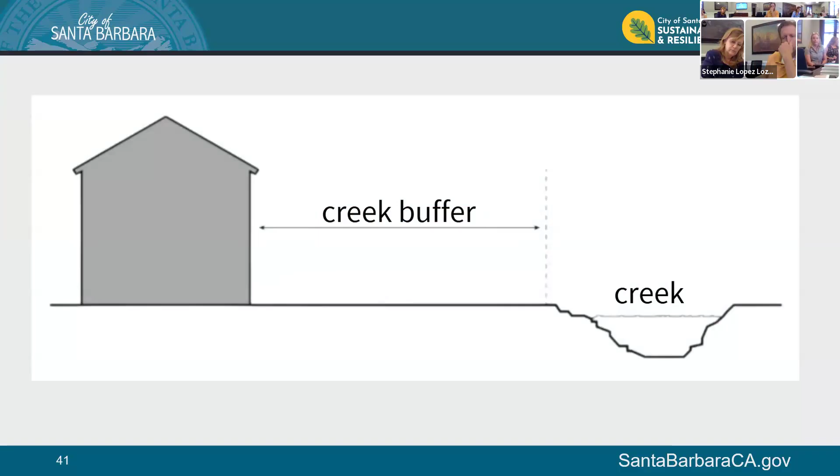So the benefits of creek buffers are many, but the primary one is that you are trying to get structures not too close to the creek where they can be subject to undercutting from erosion and flood risks.

In addition, we're really trying to limit creek bank hardening, so putting concrete and other things in the creek that can actually speed up the creek and cause downstream erosion and significant flooding.

In addition, the creek buffers provide an area for runoff to be slowed and infiltrate into the ground before entering the creek, so that has water quality and flood protection benefits.

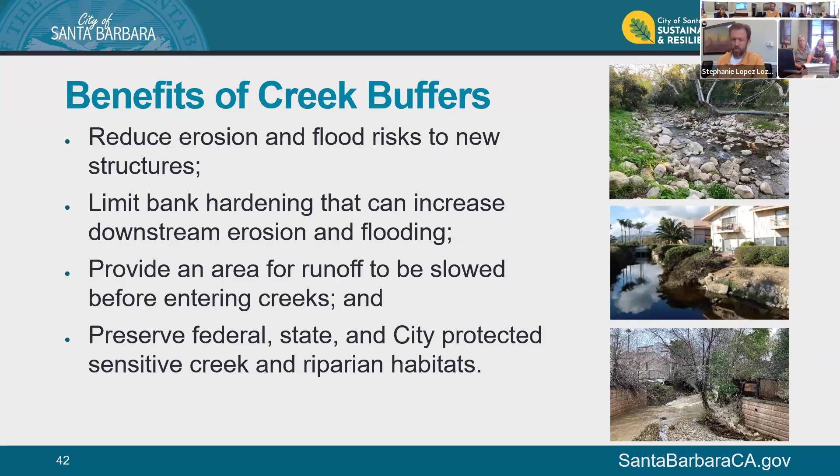And in addition, we are required by the state and federal government, and with our city policies, to protect sensitive creek, riparian, and wetland habitat.

Next slide. So we've gotten the question of why does it have to be an ordinance? Like, why do we have to protect creeks with an ordinance? Our only codified creek buffer is 25 feet from Mission Creek, and it really comes from the 1960s when there was a lot of flood issues in the city. There are no other codified creek buffers in the city.

And so the way it works now is that when applications come in that trigger CEQA reviews, those are discretionary applications. So those are things that either the city is proposing or which requires a body such as council to make an action based on their judgment. So those are things like coastal development permits, conditional use permits, and some design review permits. When that happens, that triggers environmental review.

And so through that, we are doing case by case determinations of buffers based on technical reports and basically a back and forth between staff. And it's really led to a lot of cost, a lot of time, and a lack of consistency over time.

But in addition, as we've seen a lot of legislation, particularly with housing at the state level, that bypasses discretionary reviews. So a lot of those state laws now say you can't have discretionary actions, you could only have building permits or ministerial actions. We're seeing a lot of cases of things like accessory dwelling units and things we want, like we want all those things for housing, but we are actually seeing some of them built right on the creek bank, right there. We've had several cases of concern.

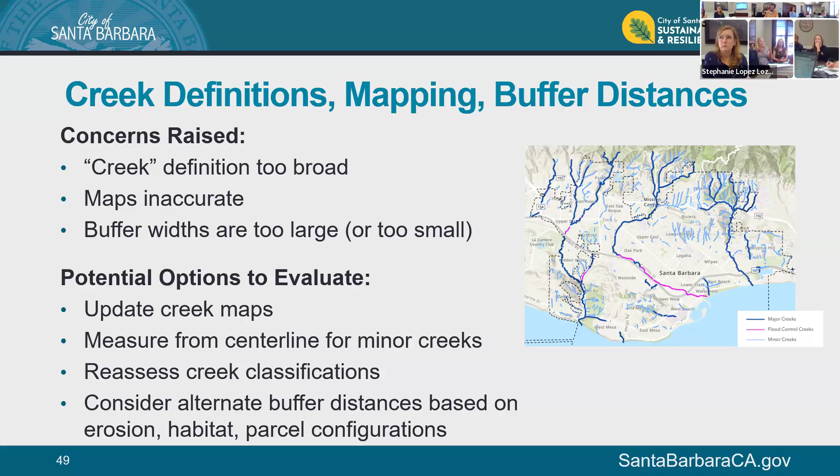So for instance, within the 50 feet, there is a zone for less use versus more use.

Thank you, we're so sorry for being late, we had a presentation at the IPM committee this morning, so sorry. But thanks so much for coming.

So we had a lot of comments about what's allowed in buffers. The current draft is very restrictive as far as what would be allowed to be done within buffers.

So we're definitely hearing the comments of wanting to have some sort of minimal use of that space, whether it be sheds or patios or landscape features.

So we're taking those considerations to heart and looking at how we could address those, as Melissa was just stating. We could have, within a 50-foot buffer, let's say as an example, 35 feet from the top of the bank, maybe you'd be allowed certain things like a 300-foot shed, a hardscape patio.

But from 20 feet from the top of bank on, you might be allowed trails or different landscaping or things like that. And then from the top of bank to 20 feet, that's really just the riparian habitat area. So we're looking at options like that.

We had comments about existing historic landmarks or historic structures, or even community benefit uses that are already within these buffers that would become existing non-conforming, and concerns about the threshold for substantial redevelopment being too low, essentially. So, how would historic structures be allowed to be maintained if they needed to make significant structural repairs, as an example? Those are things we're looking at as well.

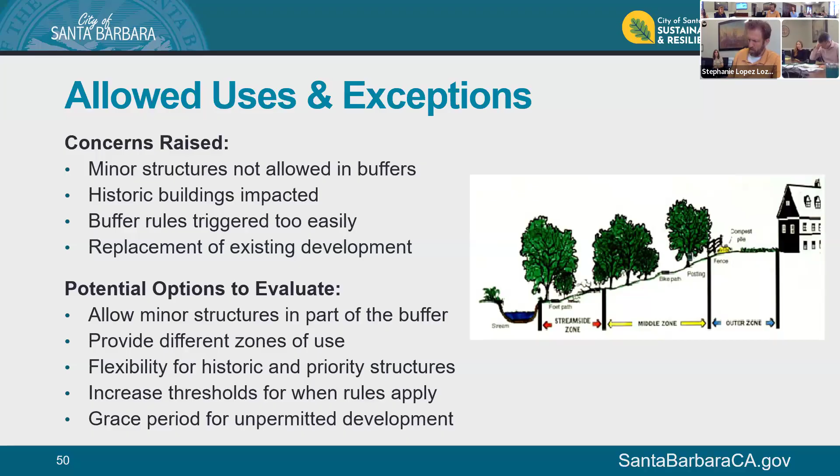So we heard a lot of comments just about the organization and clarity of the ordinance. It's currently organized by process, like what permit process a person would go through if they were doing work adjacent to a creek. So we've looked at maybe changing that to look more specifically at different types of projects falling into different categories, basically reorganizing the ordinance.

The modification process as outlined right now is too costly, but also potentially uncertain. The outcome felt uncertain based on the community comment that we got. So we're looking at potentially trying to make that more objective, and have it state, instead of a modification may be granted, if you do XYZ criteria, it will be granted, just to provide more clarity.

And we had a lot of comments about the need for this ordinance, and kind of like, why now? Why are we doing this now? A lot of questions about, we have existing floodplain regulations, why do we need this? So I think that's on us to really better communicate the why behind this. Floodplain regulations are not changing, those are federal regulations that this ordinance does not touch, but there are other considerations, other hazards like erosion rates that we are trying to address here, as well as resource protection considerations.

So the issue is, when we talk about urban stormwater runoff, really the biggest effect on water quality in this city is pavement. All the runoff associated with pavement contributes the most to water quality degradation, and that essentially modifies the hydrograph. When it rains, typically in a prehistoric environment, water would soak into the soil mostly, and that contributes to groundwater, contributes to base flows in the creeks that allow them to flow between storms more often. It also has less of that peak flow hitting the creeks right away during a storm. However, when it gets paved, you get that water.

It's essentially flash flooding, on minor and major scales. That causes increased erosion in the creeks, which creates channel instability, which then erodes banks, affects properties, affects houses and structures built next to the creek. It also affects habitat, wearing away around roots, and causes down-cutting in the creeks, which basically creates this snowball effect with a lot of different detrimental effects.

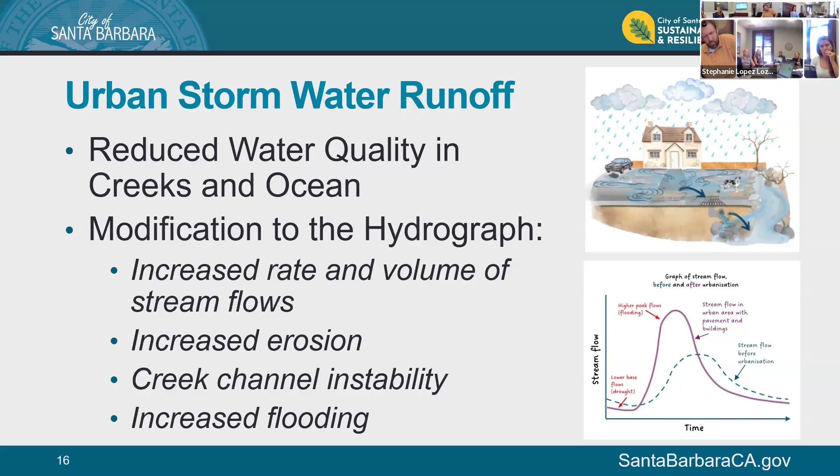So when we modify this - you can go to the next slide, thanks - when you talk about low impact development, that's modifying this already built environment by capturing and infiltrating that stormwater on site. We have pavement, it's necessary in a lot of places, but wherever we can capture that runoff as close to where it occurs as possible, that can increase groundwater recharge and creek base flows between storms. This improves water quality, because a lot of pollutants directly run off, and many of these pollutants can be naturally processed in the soil by microbes and plant uptake and things like that. It also reduces that peak of runoff, flooding, and erosional forces.

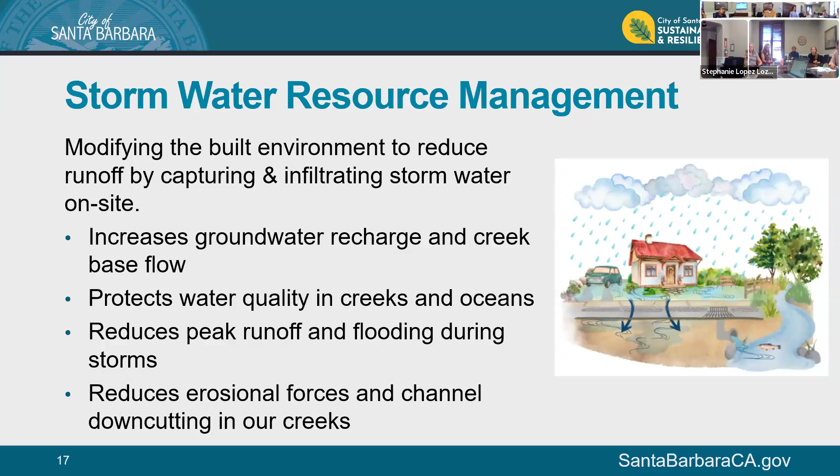So next slide. For the purposes of this presentation and project, a parkway is the space between the street and private properties that's not sidewalk - that's what we typically call a parkway in the city. This is public property for the most part, in the right of way, and it will contain landscaping, sometimes concrete, utilities, street trees, signs, and driveways. It's sort of everything thrown in there. In most cases, the responsibility for maintenance falls on the property owner, and it's often landscape, and often hardscape. Next slide.

So these parkways represent an opportunity to implement these LID approaches in the city. This is city-owned property that we could utilize, along with the cooperation of property owners. A lot of cities for years have had programs that utilize these parkways for stormwater capture, citywide and countywide programs.

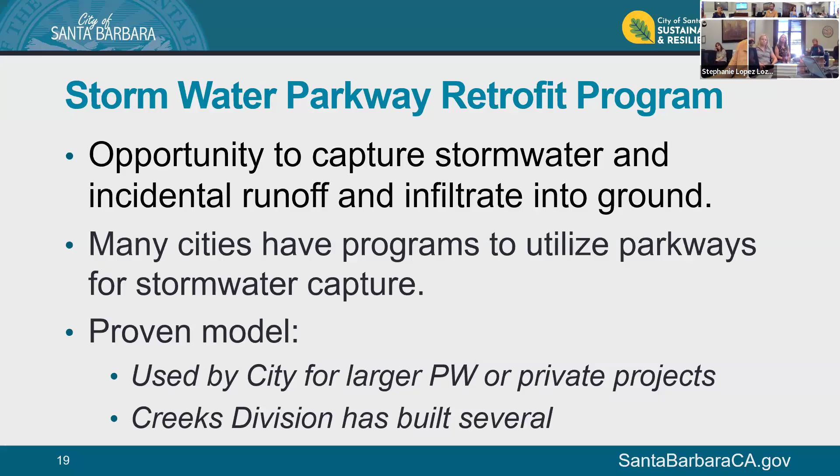The City of Santa Barbara has done pilot projects. The Creeks Division has done some, and Public Works has done many, a lot of those associated with compliance with the stormwater management program in order to capture runoff when there's larger projects. But we haven't had a citywide program. It's been a bit piecemeal, and we haven't had cohesive, standardized designs and a driven outreach for that.

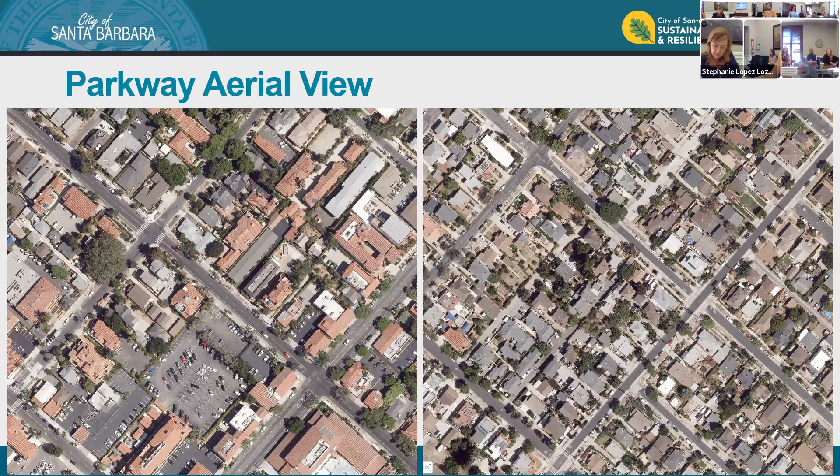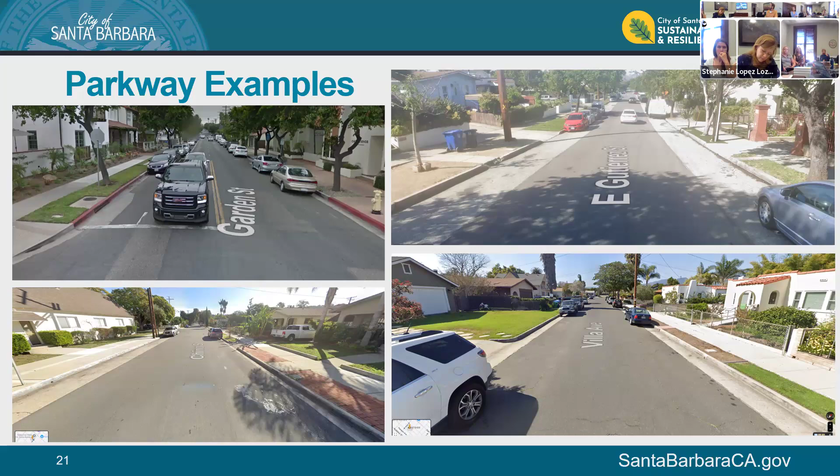In that bottom right picture, on the left side it looks like it's just a big yard, but that's actually city right of way—it just doesn't look like it. Next slide.

Programmatically, citywide, we've got about 27,000 parcels. If we assume 50 feet of frontage—the median frontage of lots is actually 66, but 50 feet is conservative considering driveways and things like that—with a 5 foot wide sidewalk, that equals about 250 square feet of sidewalk per parcel.

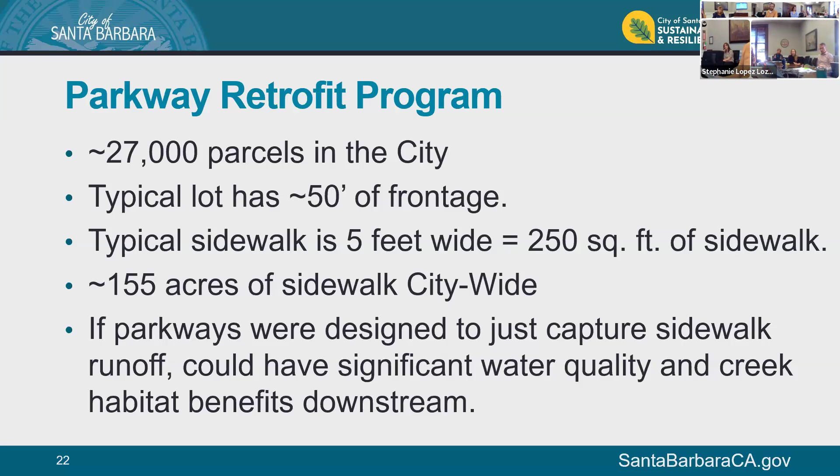Pushed out citywide across 27,000 parcels, just counting the sidewalks, that's 155 acres. We often, when we do projects, look at the impact we're having, how many square feet of runoff we're capturing. So the potential here, with a program that can be done relatively cheaply and expanded out, could have a big impact—and most importantly, right at the source, which is that LID principle.

Next slide. So we've been developing this program, and coincidentally, a resident reached out to us and said they were interested in doing something in front of their property. So we developed plans.

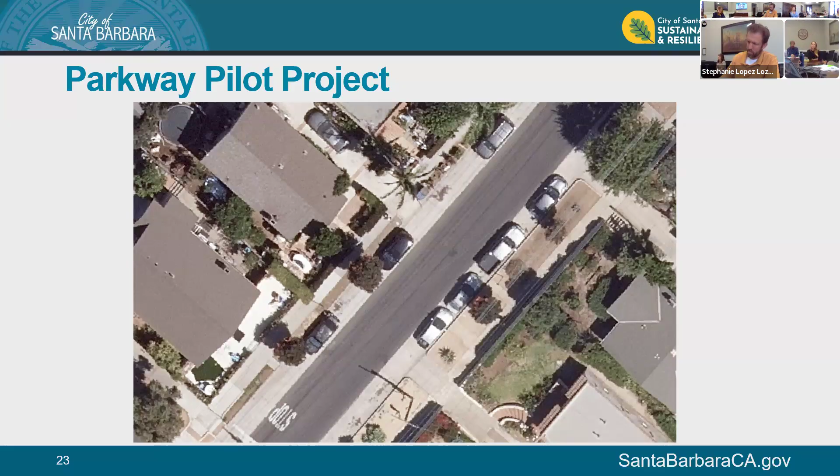This is on East Gutierrez Street. We're looking at the aerial photograph on the right side of the street, and the house on the right side—the top house—you can see that brown parkway in front of it. It's a 9 foot wide parkway. Next slide, I think there's more pictures of it.

Here are photographs of it, from across the street—this is the parkway. It's a great opportunity to capture stormwater, but the way it is right now, it's mounded. A lot of the sidewalk runoff runs down the sidewalk and then off the crosswalk or into the neighbor's parkway, which is essentially impervious. So this is a great one to kick it off.

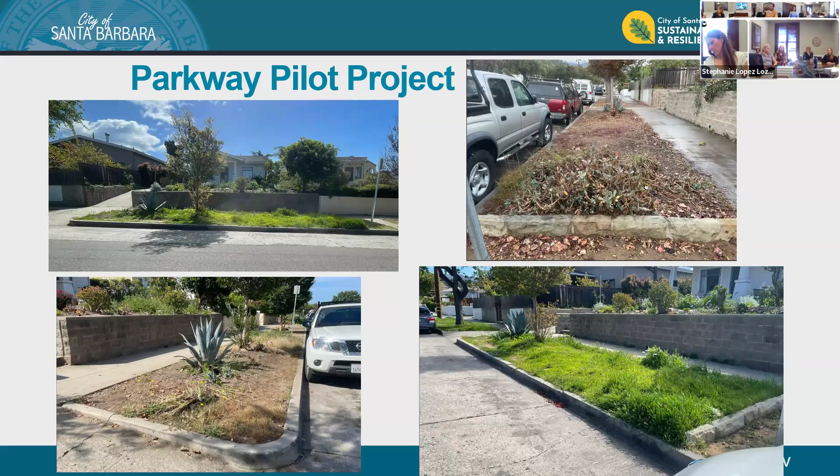These are just different angles of that. Next slide. This is a thumbnail sketch of what you could do in a parkway like this—there's a tree in the middle, and we have a lot of constraints: a water meter, gas lines, sewer, all the things you'd have to work around. But essentially this is what we're looking to do: capture some of that gutter flow.

Because this is such a wide parkway, we have the width to grade it down a bit, getting it below the level of the gutter, and create a passive flow from the gutter into this parkway. Next slide.

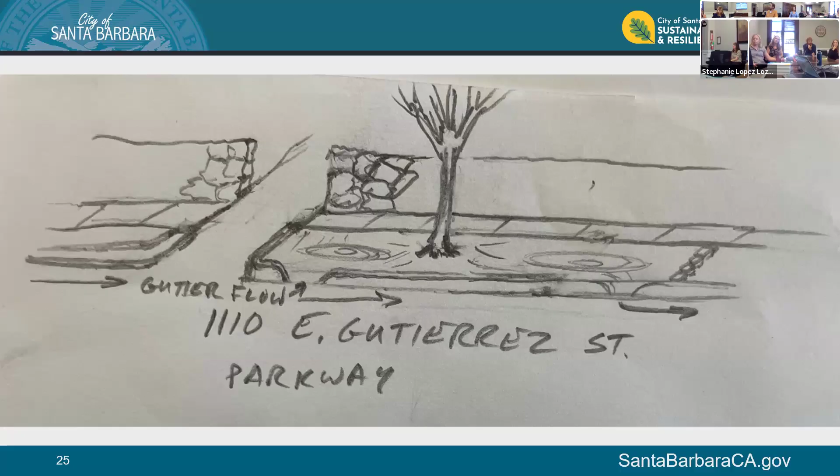And so we surveyed it, worked with the property owner, engineering, transportation, and parks, just making sure we're checking all of the things that might be a concern: pedestrian access, the slope, and anything the neighborhood needs.

This is the more developed plan. It still looks like a sketch, but this is what we went off of. Based on the surveys, you can see that's the whole parkway, the curb cuts on the left and right. So the street is on the bottom, the sidewalk's on the top. And then creating cross sections, this is basically to help us build this thing.

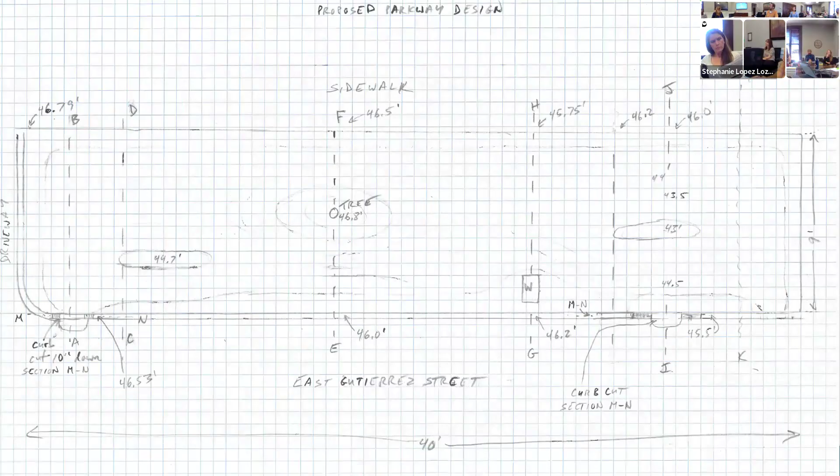And here's a cross section showing where the curb cut is. And this is where the tree is.

For this project, the cost to build it was $6,400. That's excavation and soil removal. The timeline was August 2025, and actually we built it yesterday.

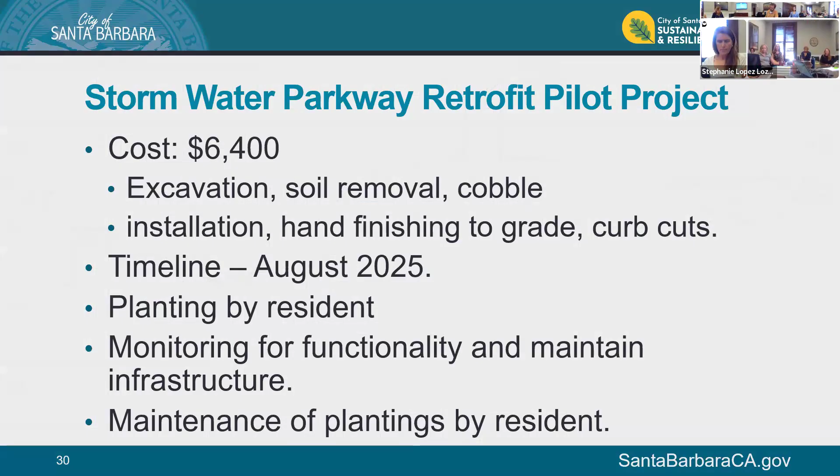We're still working on it. I just came in late because I was talking to the concrete cutter contractor. The resident will plant it, we'll monitor for functionality and maintain the infrastructure.

This is yesterday, excavation. And this is a little bit more cleaned up.

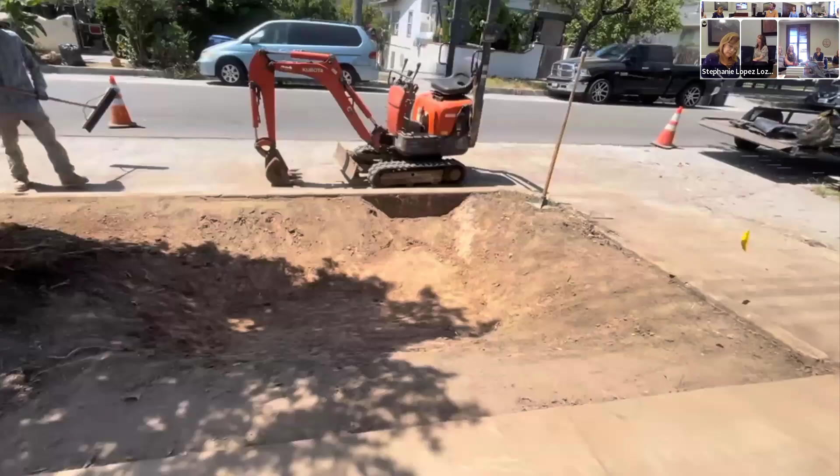Oh, okay, and I inserted some, but they probably didn't get in here — I had it before and after. But this is basically, you can see where the curb cut comes in, what that's going to look like, and we're going to cut that, and then that'll be planted.

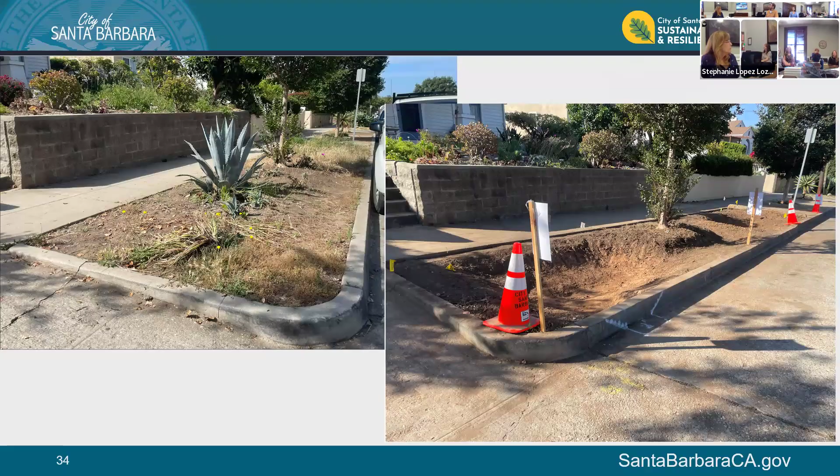Oh, it did make it, okay, here's sort of that before and after. And you can see where I've spray painted on the curb where that curb cut will be, on the right-hand side.

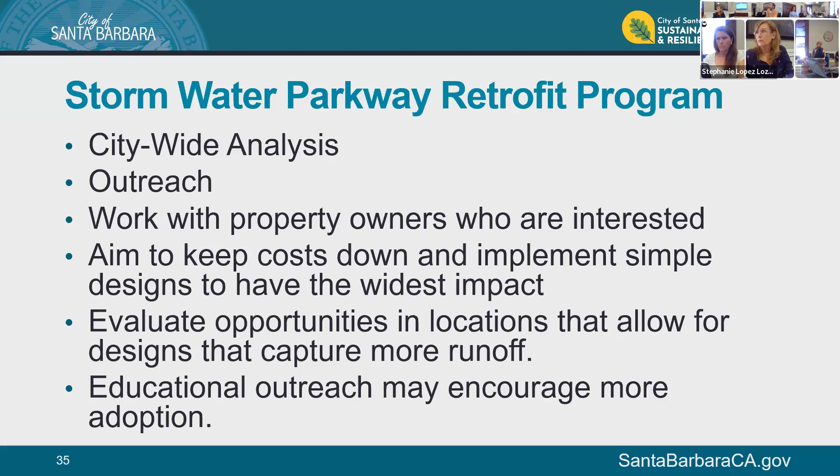Moving forward, we've done a lot of analysis, looking at all the different factors that might affect how we design a parkway: the slope, the width of the parkway, how many trees there are, how many utilities. We have this in a database, creating something where we can target outreach in places that might be ideal to put these in. We'll work with property owners who are interested, and the idea is to really try to keep costs down so this can have the biggest impact citywide. As we do outreach like this, it may encourage more people to approach us.

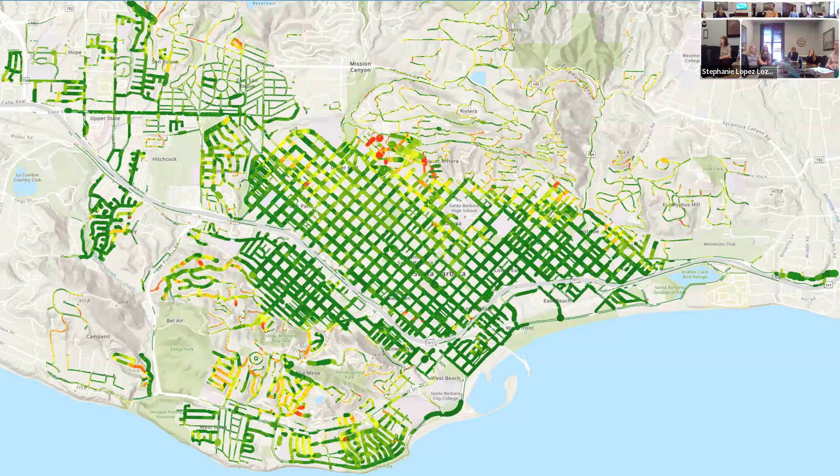This is an example of one of the analysis maps that comes out. The darker green color is low slope, all the way up to red, which is a really high slope. The thickness of the line is how wide the parkway is. There are a lot of other variables — we're just throwing those two in there visually so you can kind of see what it looks like. There's not data up in the Riviera; those actually do have parkways, but the data wasn't there, using the street tree data anyway. But this is helpful.

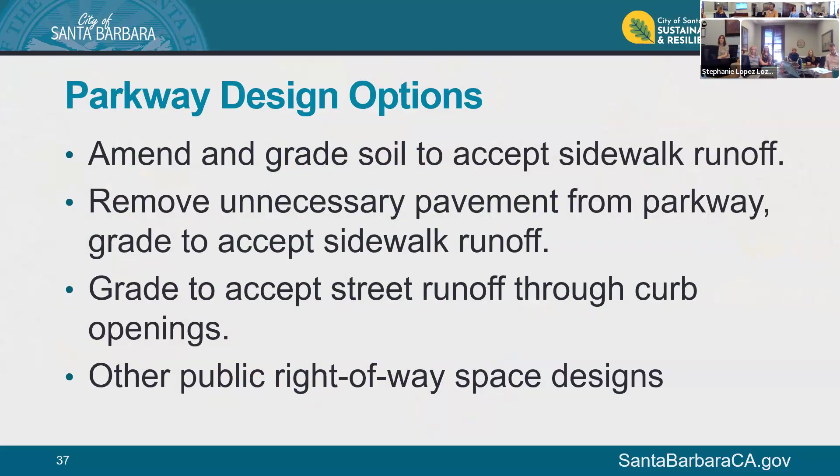So we have three different options. The most basic option would be capturing that sidewalk runoff and allowing it to flow into the parkway, in places where we have pavement in the parkway — maybe a resident says a neighbor built that years ago, they didn't build it, they don't need it, and would love some kind of rain garden there instead. We go in and remove that for them and grade it to accept the sidewalk runoff. The next option would be to just grade where there isn't pavement, but still accept sidewalk runoff. And the biggest project, like the one we just piloted, would be to accept the street runoff — that takes a little more engineering and design. I'm not sure how scalable that is, because it's going to be limited, but wherever we can do it, we will, if possible.

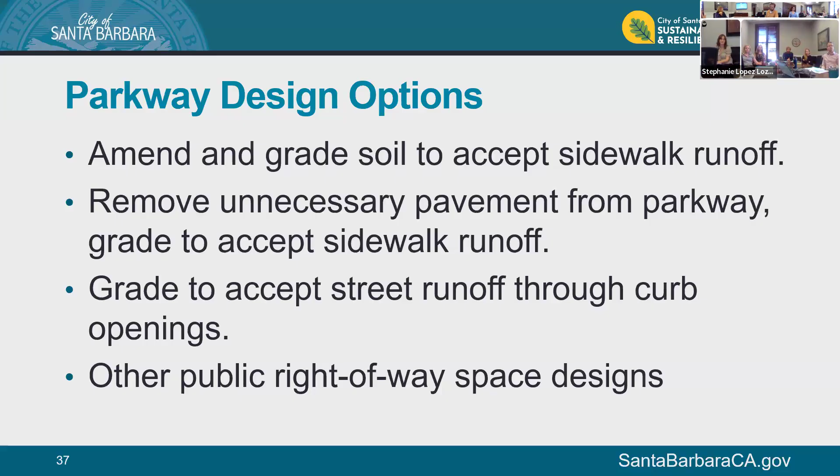Just to add to that, there are probably other publicly owned spaces we can extend this to — not necessarily parkways, but parks, open spaces, or other city-owned areas where we can capture this runoff.

And then outreach — typical outreach: put it in the newsletters, social media posts, a city TV segment we're working on, and outreach events and meetings like this, which are really helpful. We have one minute.